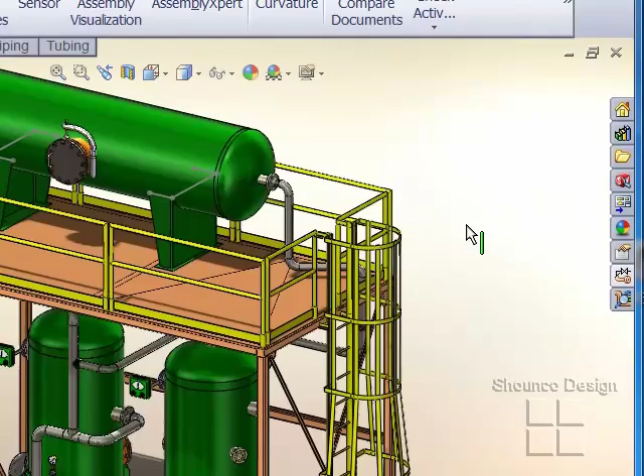Today we're going to look at using SpeedPak with our assemblies and how we can use them to enhance our performance. Here we've got a large assembly with a bunch of small assemblies, and in one of them I've got a subassembly tank with a cover on it, which is another subassembly.

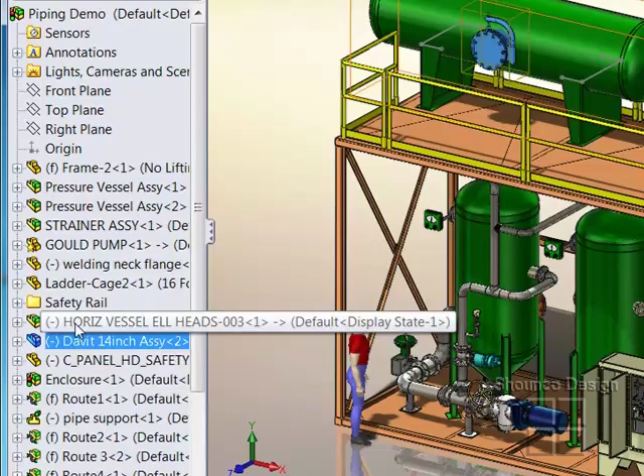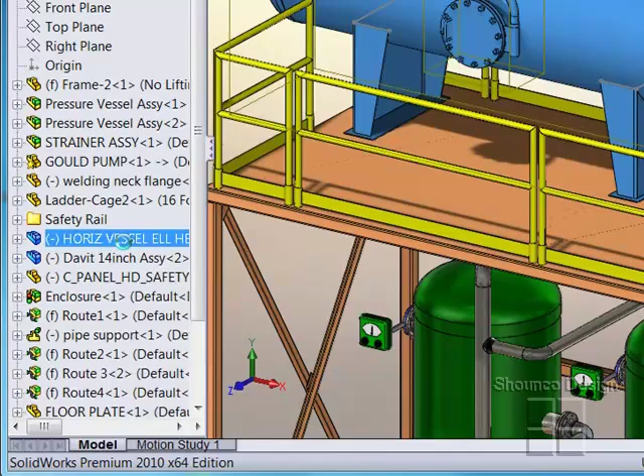I'm going to start by joining these two subassemblies together, holding Control and selecting them both. From the right click menu, I'll choose Form Subassembly. It's cut off a little so you won't see it, but that option is there, and you'll see those two subassemblies joined together into one. I can save that under a different name when I'm ready to save this assembly.

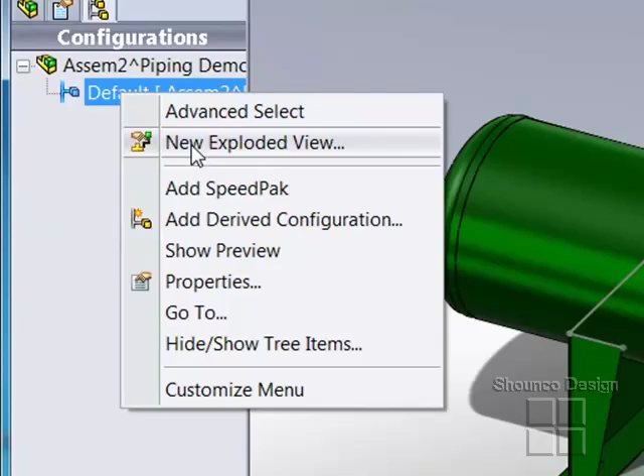The first thing I want to do is take a look at our subassembly, and we're going to open this up. There are only a few items here that are really going to be of use to us when we mate this. I right click on an existing configuration and choose SpeedPak, Add SpeedPak, and here are some different options. One thing it will ask us is which faces and which bodies we're interested in, so we use these two selection boxes to tell the system what's actually going to load when this SpeedPak configuration is enabled.

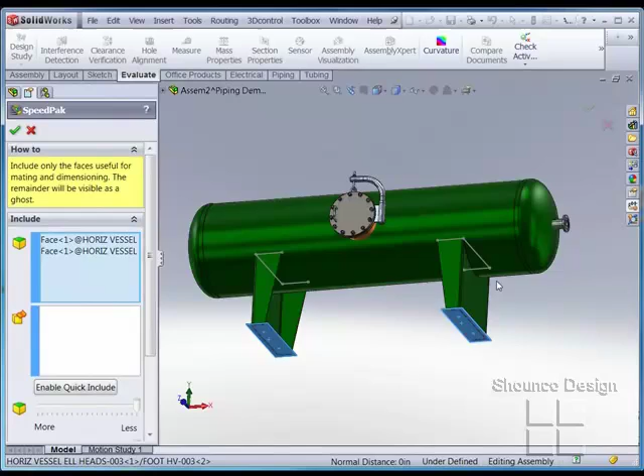So we'll choose the two bottom plates, since we're going to use those to put them on the ground, and then I'll choose the fitting here at the end. As you can see, when I hover over, the typical behavior for SpeedPak is to show the unloaded parts as a ghost.

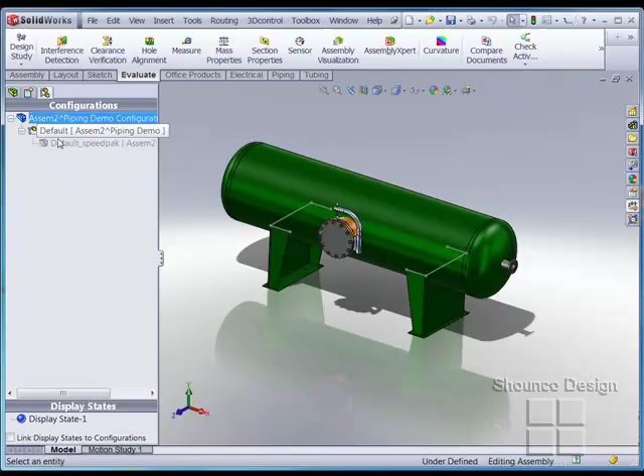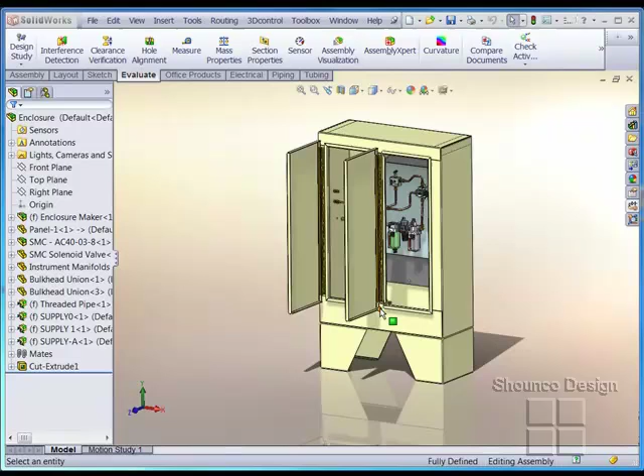Back at our main assembly, we're going to add another SpeedPak configuration. Let's open this up. I'll look at the faces across the bottom, all the different faces we might need for loading this. Again, I right click on the configuration and choose Add SpeedPak, and now I can choose all the faces I'm going to use for future mating of this part. I can always go back and edit this and add another face later if it turns out I missed one.

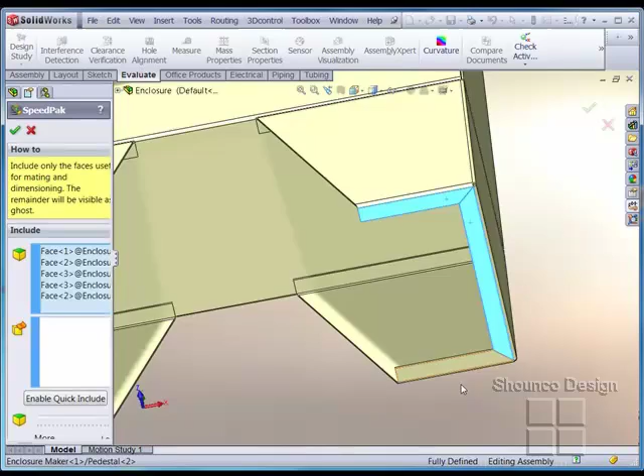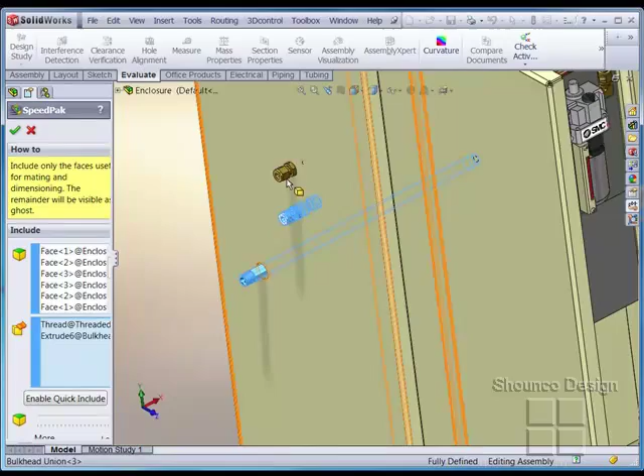So let's pick all the faces that might mate to the floor and all the faces that might help me put a distance mate somewhere. This also has some common fittings that we'll be running piping to, so I'll choose those bodies as things I want resolved as well.

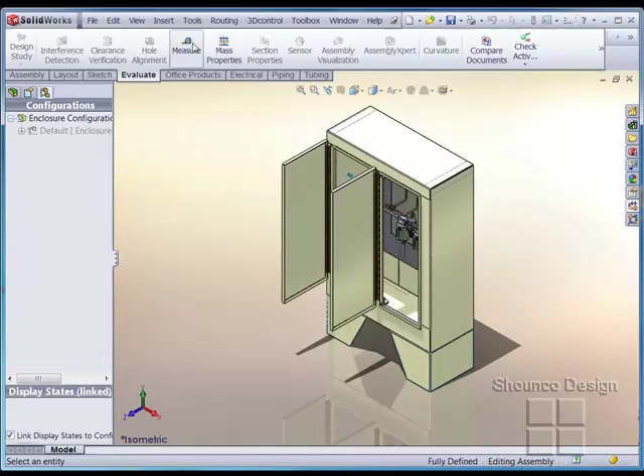When I'm ready, I'll accept this, and you'll see again that the mouse cursor, when hovering over items not loaded into memory, shows them as invisible, while the items I chose to include in the SpeedPak configuration remain visible. I've already created some SpeedPak assemblies with the other tanks in this main assembly, and you can see I've chosen to use all the fittings and the plates at the base of the tank for inclusion into the resolved components of the SpeedPak.

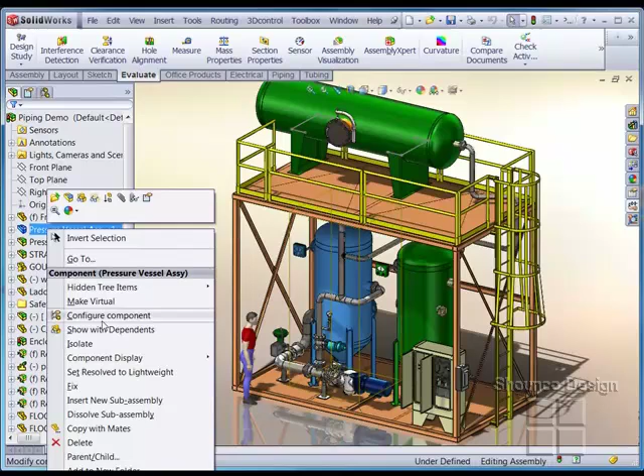What I've done here is choose to configure the component, by right clicking on a component and choosing Configure Component. By double clicking on the other components, I've added columns with their configuration information.

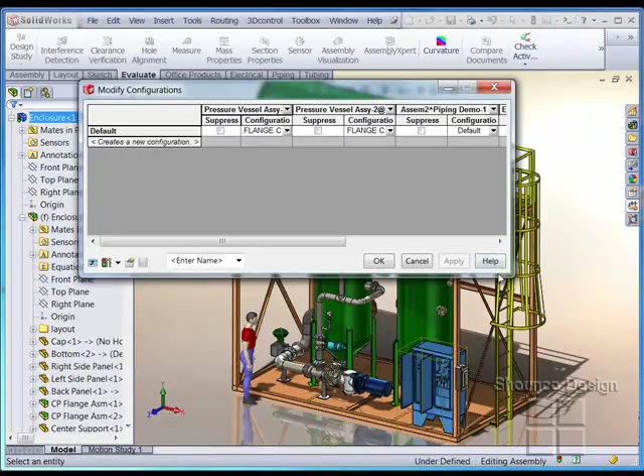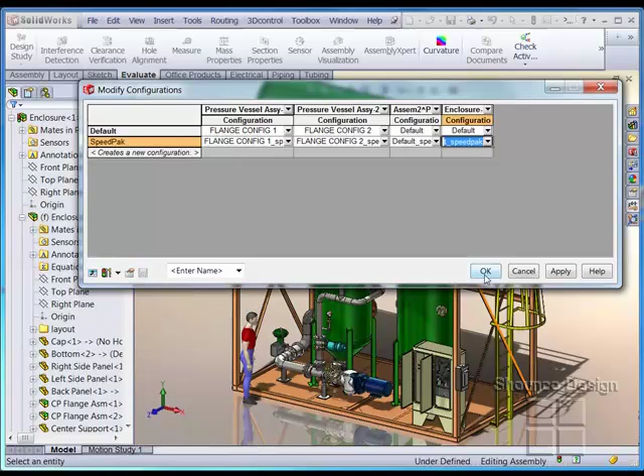I'm going to make another configuration here called SpeedPak. In this second configuration, I'll set each one of our subassemblies to their SpeedPak configuration. When I hit OK, I've essentially created another configuration of this larger assembly, specifically for our SpeedPaking.

As you see when I hover over with my mouse, only the components I've chosen to load for mating purposes are actually resolved and loaded into memory.